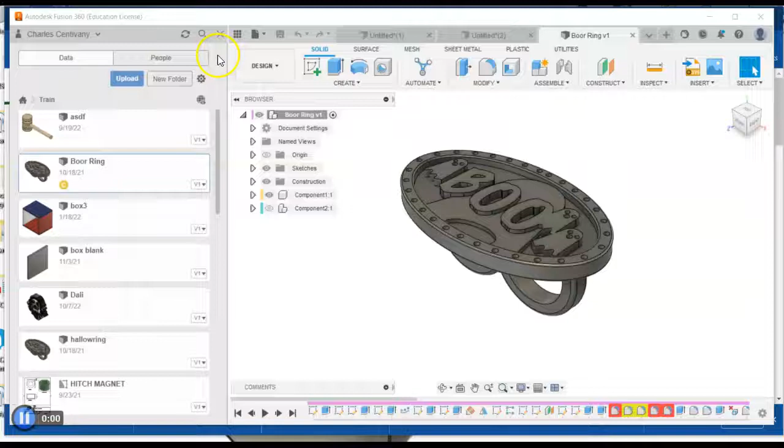This video is going to show you how to take your design, in this case my Halloween design, and slice it using the Dremel slicer, or the Dremel DigiLab, for the Dremel 3D printers.

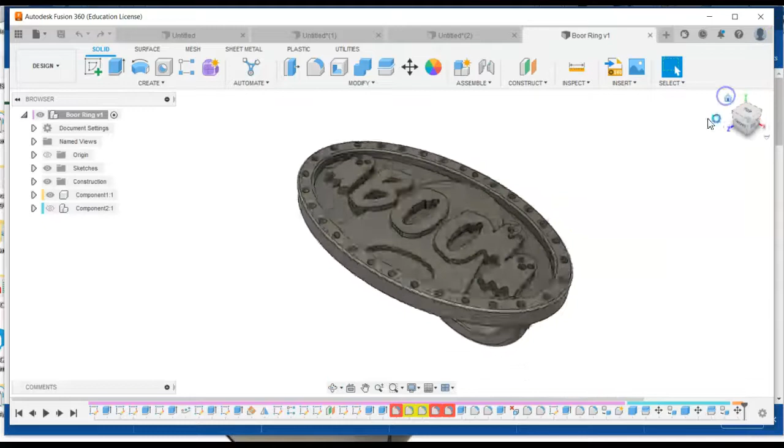This is a design I made last year just for fun. It looks like it says boom, but really it says boo, and there are all these ghosts, including the O, or like the eyes of this ghost in the background. It's a ring that goes around 2 fingers, so when it prints out you can put it on 2 fingers and have the most vicious bling in the universe.

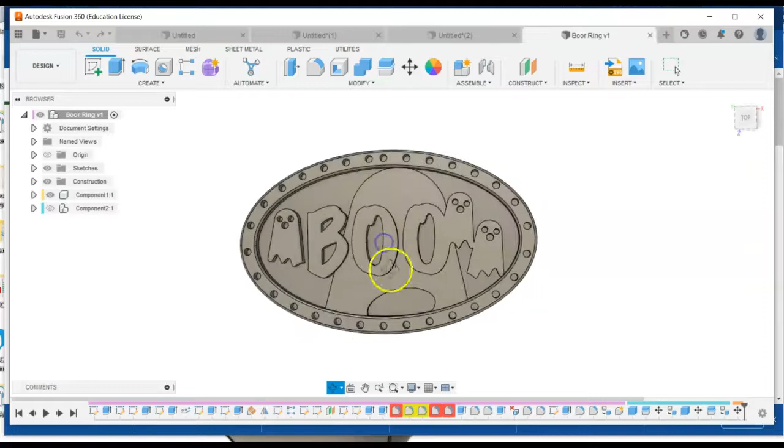Anyhow, we're going to slice this using the Dremel DigiLab slicer. The first thing I need to do is make this file into what's called a mesh file. How do you do that? You right-click on the name at the top of the browser and say Save as Mesh.

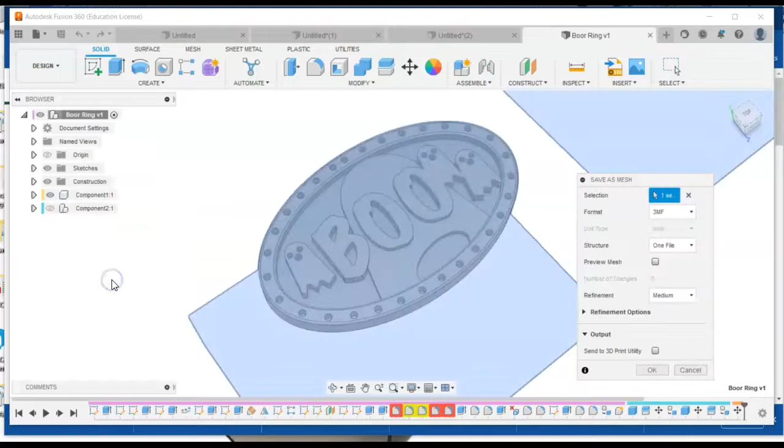A window pops up, and we're going to convert the format to an STL binary, and we'll just say OK. It's going to put it into my downloads, and it's going to be called Boor Ring version 1. So that's where I'm looking for it after I save it.

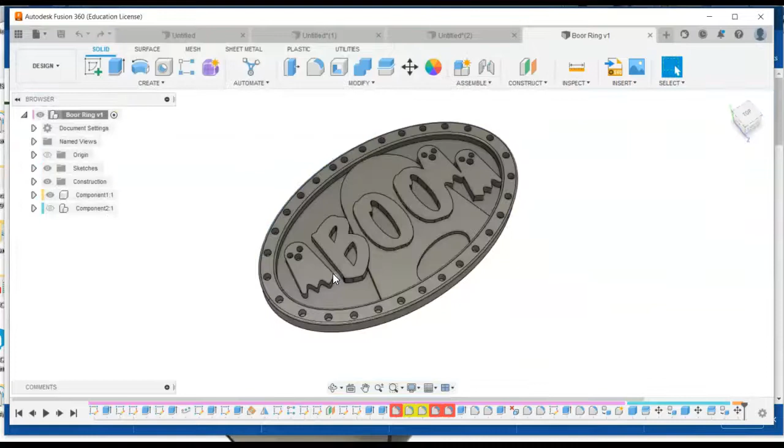Now you should open up Dremel DigiLab, and you get a window that looks like this. We're going to run through a lot of this stuff. If you were lucky enough to use the Dremels and get good at it in middle school, please still watch the video, because there might be 1 or 2 things in this video that maybe you didn't know already.

The first thing, and this is the most basic, is which 3D printer are you going to use? We have 2 different ones in the lab. One's called a 3D40 — those are the silver ones with the silver face. The ones with the all-black face are called 3D45s. I'd say they're about the same; I think the 3D45 gives you a couple extra things, I don't know.

The 3D40s have a nice bendable build plate — that can be an advantage. The 3D45s have a glass build plate, so you need to come up with a plan to remove your materials after you use it.

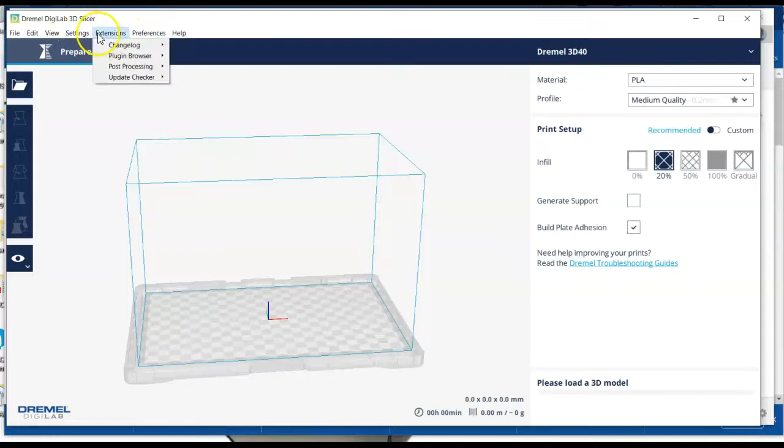So you have to tell it at the start which printer you're using. I think you go to Settings and Printer and just choose. I've got both of mine listed here. If yours isn't listed, you could say Add Printer and choose the printer there. I'm going to go ahead and do this one for the 3D40, the one with the silver face.

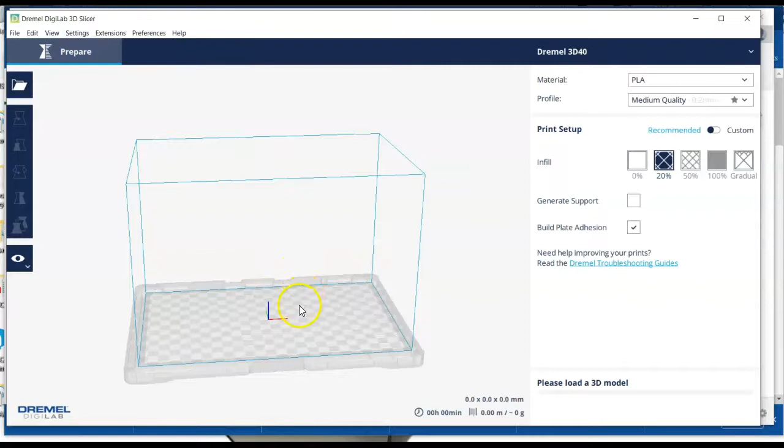The next thing to do is add your model. I would go to Open File, find my ring, and just say OK. And it looks like nothing's there. Well, something is there — it's just awfully, awfully small.

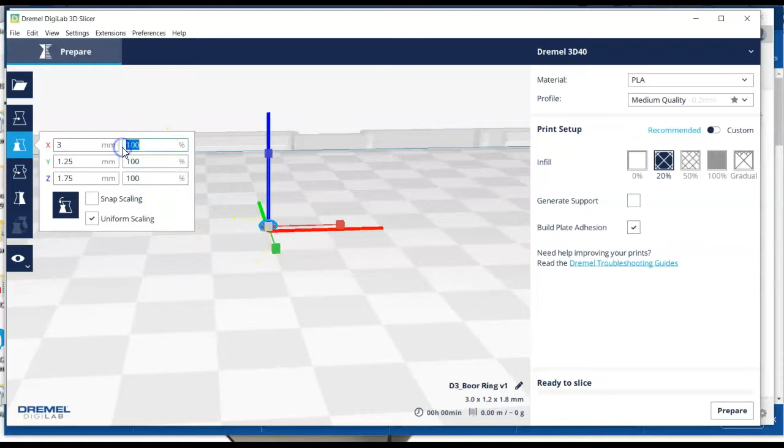So I'm going to select my awfully small ring and scale it. Here's what you want to do for scaling: make sure uniform scaling is on, in case you have a very small design like I did. I'm going to click this and choose 2540, which is a scaling factor between, I don't know, millimeters or something and inches or something.

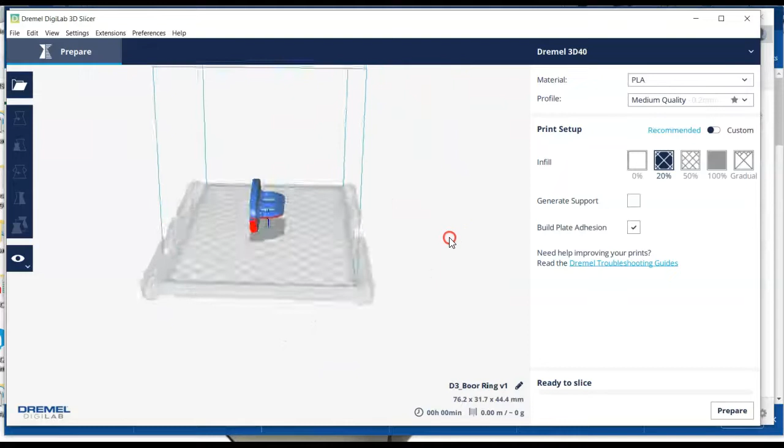Now I've got my ring, and it looks like it's about the right size. But the orientation is really bad — I wouldn't want to print it this way because too much stuff is floating out over space. So I'm going to change the orientation.

I'm going to select the model and choose Rotate, and I want it to lay flat. Well, that didn't do much. How about we choose Rotate, select the model again, choose Rotate, and try to slap it down. What if we...

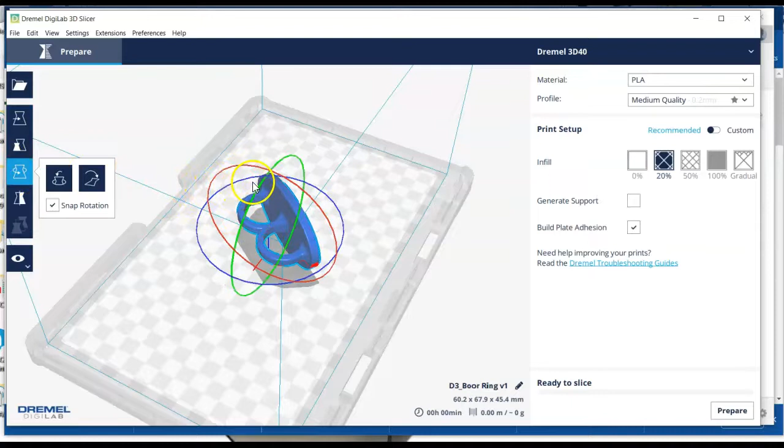And then grab this one and... I'm getting closer, but I'm not great, right? I'm doing all right, but not perfect. So what if when we get to about here, we click this lay-flat button? Oh, and it just sticks it right down on the surface.

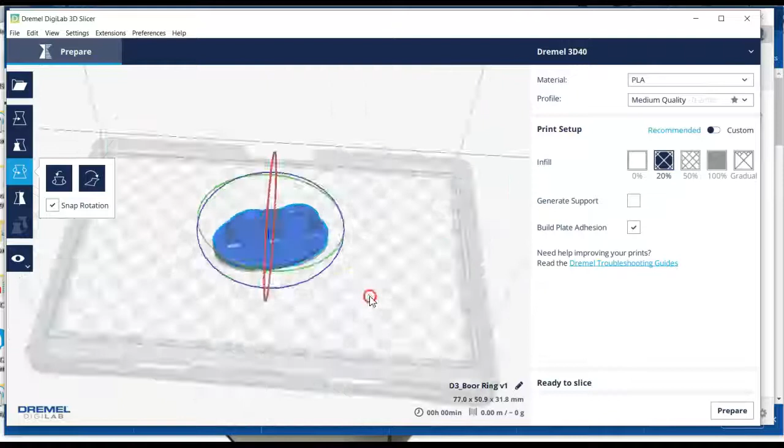So this would be the ideal printing orientation for this model. The scale's good, the rotation's good, I don't need to mirror anything, and I don't need to move anything, so I'm feeling pretty good.

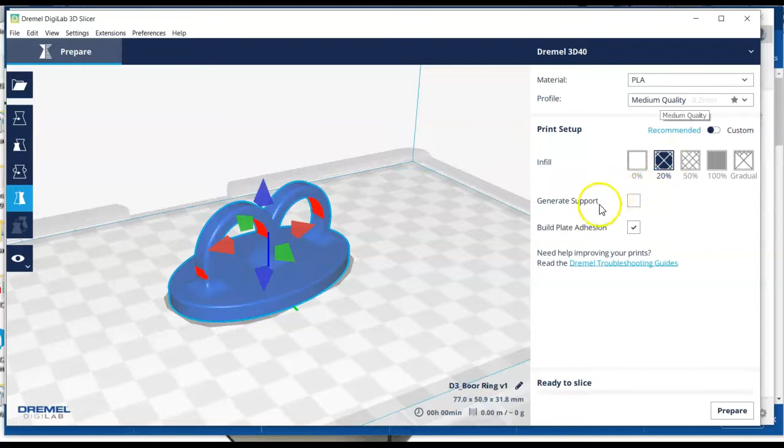Over here on the right you have all these settings. PLA is the type of material we're using. Medium quality is fine, and you want to make sure the infill is little. Then supports — supports are debatable. I think I made this design so it really didn't need any supports, but your design might need lots of supports.

I think where you're seeing this red stuff, it's suggesting that maybe you should have supports, but I'm going to go ahead and roll with no supports.

Before I go ahead and slice it, I'm going to change the name, and this will help everyone a lot. You could say your last name and then maybe Halloween. If everybody's just leaving it with the default file name, it's going to get very confusing as you have to look through flash drives and whatnot.

Okay, so I've changed the name to Centivany Halloween. I'm going to say prepare, and it's slicing up my ring — that works pretty quick. It's going to take 1 hour and 17 minutes, use 4.3 meters of filament, and weigh 12 grams.

Then you're going to save the file locally — mine's going onto my desktop. Once you save it, you would put it onto a flash drive and take it over to the machine, plug it in, and print it. You'll notice it's going to be a G code file, so a .gcode. And that's about it.

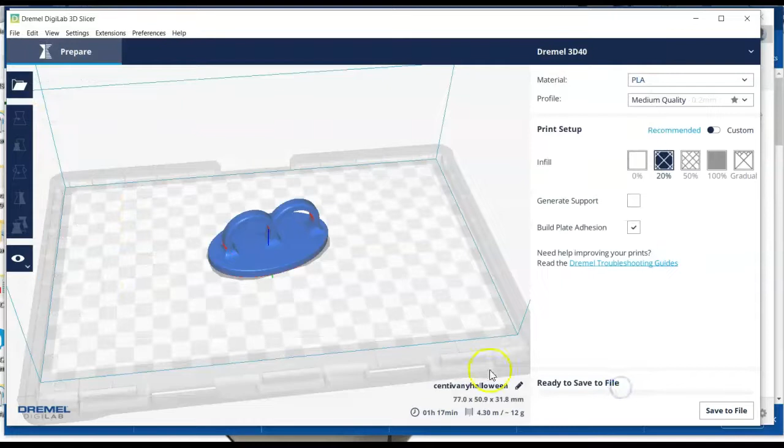Remember, these settings are really important. Please don't go into custom settings and mess with this stuff — it usually is a flaming mess.

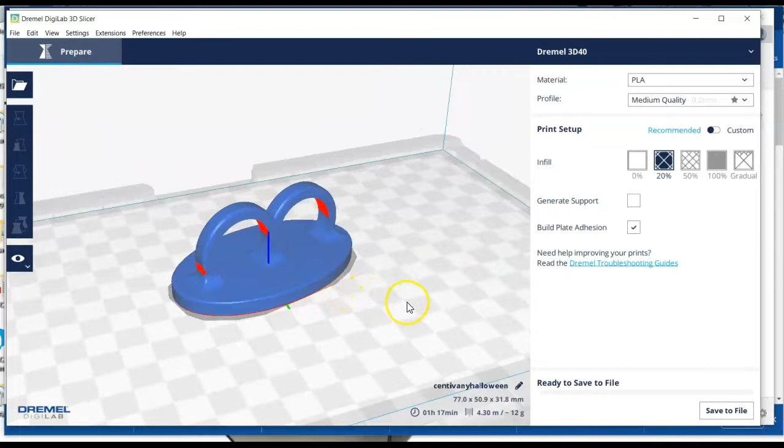So, how to put a file into DigiLab and slice it up and save it, and then once it's saved, you put it onto a flash drive, take it over to the machine, plug it in, and print.

Now, check this out. I know this video is dragging on pretty long, but there's a bunch of kids trying to print all at once. We could all use our own printers, or maybe if you sit next to somebody you like, you can get both of your prints onto one printer and maybe save us a little time. Okay? Thank you.